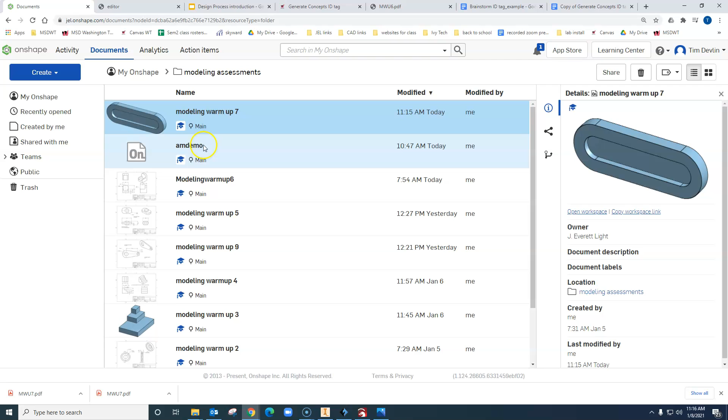So I'm going to start a sketch in the front view. Right click, view normal. And so what I'm going to do first is I'm going to make just a circle. And then I'm going to make another circle. And I'm not even going to worry about them being in line, because I can line them up, we know how to do this. It's the horizontal tool. So I'll choose the horizontal tool, choose the origin, then choose this, and it moves it up so they're in line.

Also, if we look at our sketch, they're equal. So we're going to make them equal for right now. And then we'll go ahead and dimension it too. And since the radius is 0.5, that means our diameter is, say it in your own head, double the radius, so it will be 1. So I'm going to use the equal first. Click both. Now they're equal. Then I'm going to choose my dimension tool, and I'm going to make this a diameter of 1.

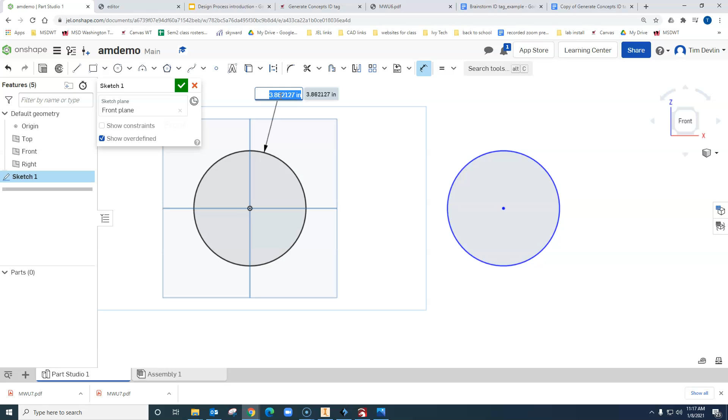Okay, now we have to space this. It's still blue even though it's equal. So we can put our dimension here, and if we go back to our drawing, we can get that here. It's 2. So I'm going to put 2 in. But now we got to connect this thing. So there's a couple ways we could do it. We could take our line tool and just draw it back and forth. We could also just use a rectangle.

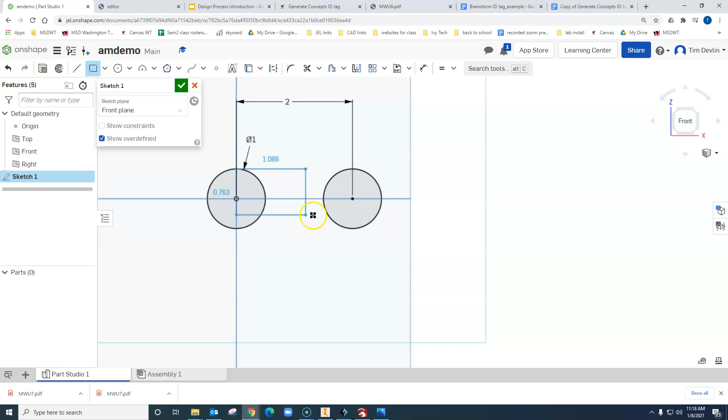So I'm going to take my rectangle tool, I'm going to line up with the origin, and then find the top of my circle. Then I'm going to go across, find the middle of that one, and I'm going to go down until I lock the center. So now it should be all constrained, and then when I draw it in, I shouldn't have to use any dimensions. So this is all ready to go.

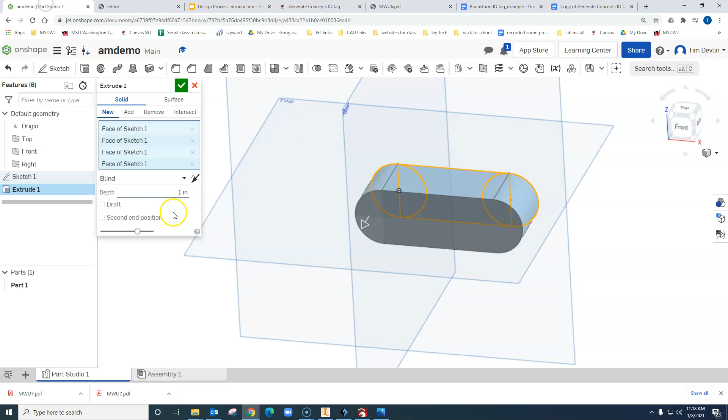I'm going to click the check, and I'm going to extrude, and I'm going to choose all the shapes that I want to extrude, and the default is 1 inch, so I'm going to go back. Here it's 0.25. I'm going to do 0.25. Click the check. Now I've got to do this next part, which is like the little cut in. So it's 0.25 smaller, but everything else is the same. There's no other dimensions because it's going to be 0.25 no matter where we're at, and then we extrude it in 0.125.

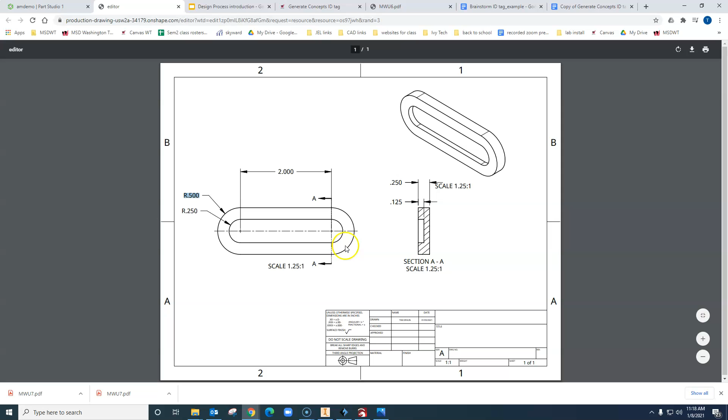So I'm going to start a sketch here, and our review tool is going to be the project geometry because we want the outside of this. So we're going to project geometry. So we click on it and it draws it in. Now here is the new tool. So the offset tool is right here. So we're going to choose offset.

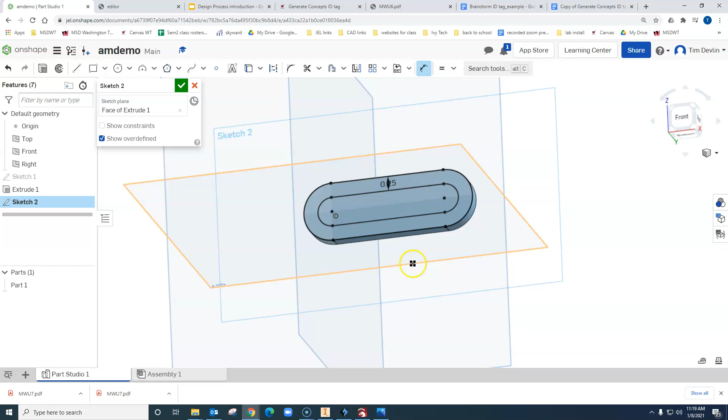And I've got to select all of the parts that I want to make an offset of. And then I'm going to start to drag it in. So just till it gets in. Then I can press the D key. So D for dimension. If I press D, this pops up. And I'm going to put 0.25 in because that makes it 0.25 smaller. And that's it. That's all we have to do. It's already all black. It's fully constrained. So we click the check.

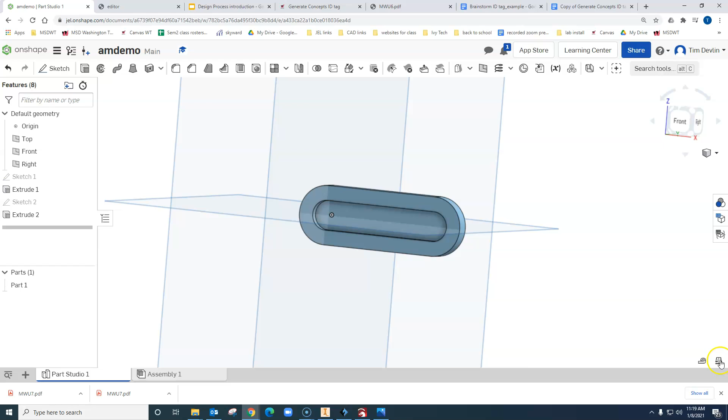I'm going to extrude. Click inside that part. Choose remove. I don't want to go all the way through, so I'll do 0.125. And then I click the check. And there's our part. Pretty sweet. So pull the properties. Make sure it's saved in your folder, and that's